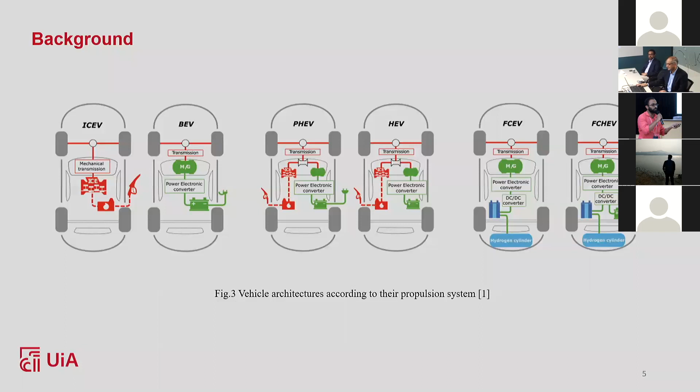Here I would like to highlight that all these vehicles are available in the market, and I had the opportunity during the summer holidays to test drive all of them. While doing the test drives, I observed that each electric vehicle operates in a very different way, and the software for the electric vehicle users is also very different, right? Some of the cars have display software more like a conventional car. But if you take Tesla, especially the Model X, Model Y or Model 3, their software or user display is very different.

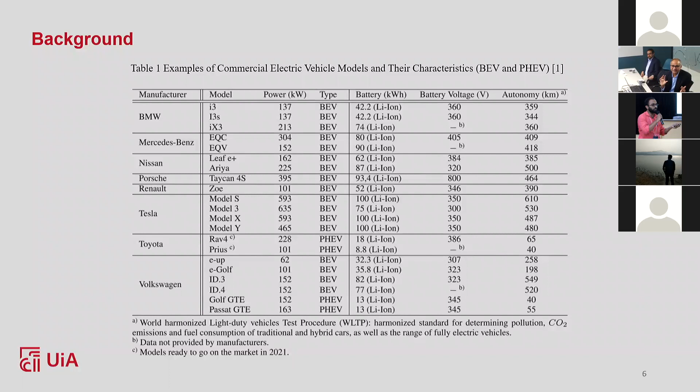But when we are driving, we have to utilize the fast charging station to get the juice in our battery within a shorter period of time. So how can we achieve that? That is going to be the key objective. So here the motivation for the fast charging station is that if we consider, let's say, the 2030 scenario, 40% of the total energy demand is going to come from fast charging stations, and it is even going to increase.

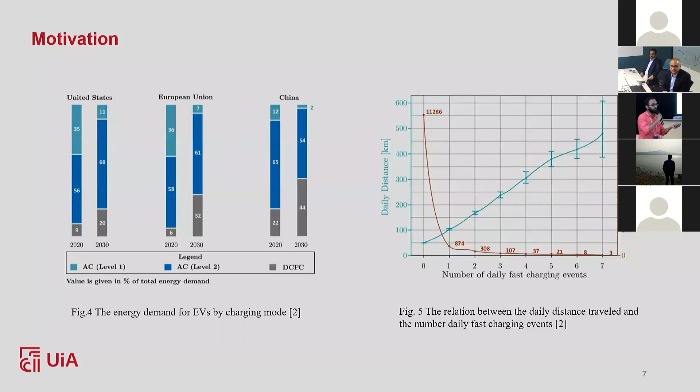Similarly, if we consider figure 5, as the number of electric vehicles increases, and when we want more distance in one charge, then naturally the number of daily fast charging events is going to increase. So when we have more daily fast charging events, they can be provided through fast charging stations. So from the supply side, from the operation side, or from the user point of view, to make the user more satisfied, we need to work on the fast charging station. So that is the main thing here.

So now from the supply point of view or from the operation point of view, and to reduce the demand within the distribution network, we have to work at point number 6, that is the fast charging station. And the fast charging station has to get some information from the car, provided through cable number 3, and that information from unit number 6 has to be communicated to the fast charging station operator also. For that, we need to utilize well established international standards, for example, IEC 61851 as well as IEC 62196.

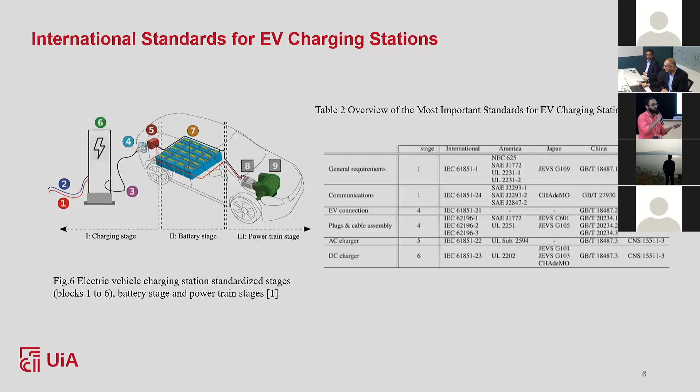So here you can see that these standards have been used by different charging units. They have been classified. I'm going to take those classifications into the next slide. And these standards for the EV charging station depend on region to region, and on how those units can be used. Let's say if we take the standard CHAdeMO, it can go up to a maximum voltage of 1000 volt, and up to 400 kilowatt. Okay, and it has communication based on CAN.

CHAdeMO is used in Japan, GB/T is used in China, CCS type 2 mainly in Europe, CCS type 1 mainly in North America, and Tesla has its own dedicated charger specification or standard. Then another one is being developed, especially taking into account Japanese CHAdeMO and Chinese GB/T, which is going to work at a very high voltage level of around 1500 volt, and it is going to help fast charging stations also. So here you can see that only CHAdeMO has vehicle-to-grid functionality, but the remaining do not. So this is another very interesting point.

What I have seen in many IEEE articles, so many academicians are working from the point of view of vehicle to grid. But here we believe that when we are talking about the fast charging station and getting electric vehicles charged at the fast charging station, this vehicle to grid functionality may not work or will not be useful at the fast charging station. That may be useful at the home level charging station.

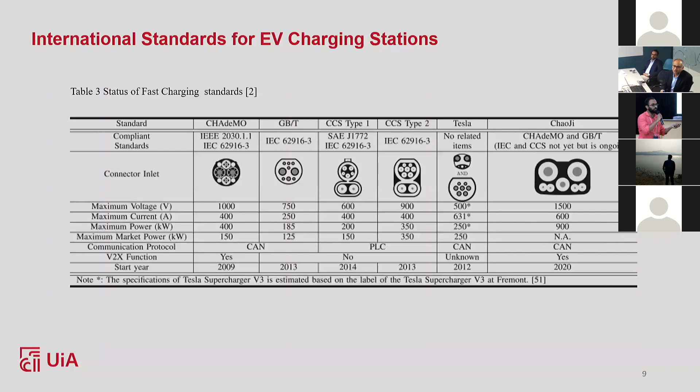So all these things we have to coordinate in a systematic way, and accordingly we have to develop the fast charging station, and then develop software or a control system for optimizing or coordinating the electric vehicle charging in a distributed manner.

So in this slide you can see that our focus is now on the fast charging station. If we take the case of the Tesla Model 3, it has a capacity of 72.5 kilowatt hour and a range of 450 kilometers, the required charging power is 174 kilowatt, and the actual maximum charging power is 250. This 174 kilowatt is required if the vehicle has to be charged within 15 minutes. So you can see how much demand there is going to be, and how we are going to manage that demand in a coordinated way.

So if an electric vehicle wants to get charged on the drive, on the highways, or in the public road network within 15 minutes, how does that demand have to be managed? For example, take the BMW i3, which has a very small capacity and a driving range of around 235 kilometers, with a battery capacity of 37.9, a very small car compared to the Tesla.

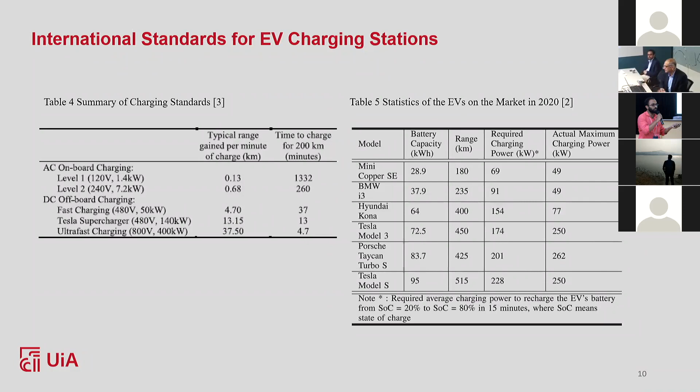Now, when we are talking about the fast charging station, there can be different types of architecture. If you consider figure 6a, considering the distribution transformer, there may be different units, right? And of course we need to have centralized storage also, so that we are in a position to fulfill the fast charging demand within the limited time, considering the grid constraints.

But now, due to advancements in technology, this distribution transformer can be replaced by a solid state transformer, or maybe using a back-to-back converter, reducing the peak demand or the active power demand from the grid by a certain amount and getting it fulfilled from local energy sources or distributed energy sources, including energy storage.

One point is very important: in Konara's master thesis work, he developed an architecture where energy storage and solar photovoltaic were integrated together, based on an AC microgrid architecture, where we implemented droop functionality to provide instantaneous power for the local loads. Such scenarios can be further modified. In place of the AC microgrid architecture, we can use the DC microgrid architecture for fulfilling the load, as described in figure 6b.

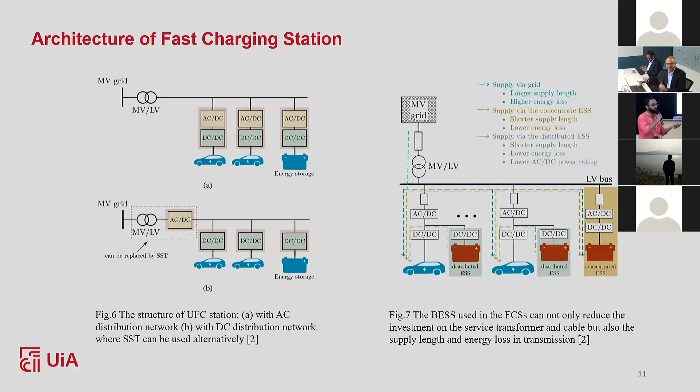For example, if it is a BMW i3, then the requirement is going to be different. If we take the Tesla Model 3, then it is going to be different. So for that, we need to have the charging coordination strategy, where we want to have more research focus, and that research focus we are considering in the PhD work of Konara.

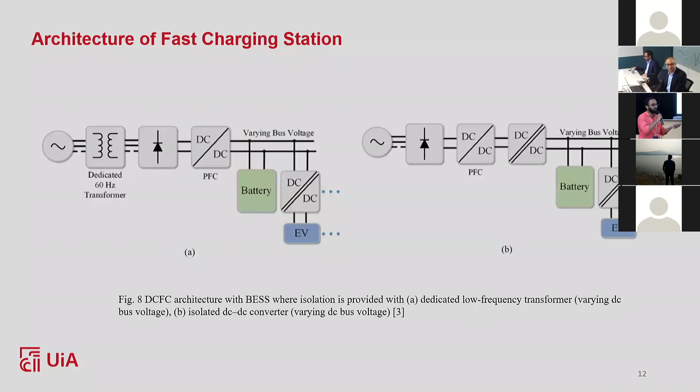And I did very good work on this integration of renewable energy sources, where we can store the electrical energy in the long term in the form of electrolytic hydrogen. So here figure 8b is basically the modification of figure A, where we tried to have the isolation through a DC-DC converter so that the unit can operate autonomously without impact on the back side. So that was the overview of the fast charging station.

What is the market need? We have seen that electric vehicle market penetration is increasing exponentially. Different types of electric vehicles are coming into the market. So we have to supply the different types of electric vehicles in a systematic way, managing the charging demand locally, so that the existing distribution network can help us cope with the upcoming demand of electric vehicles, where the focus is on e-mobility. Then next slide.

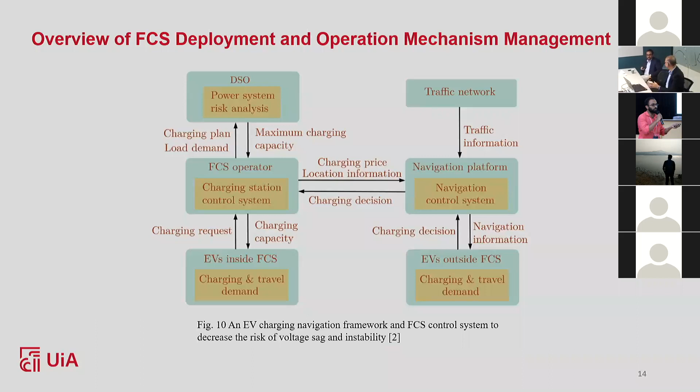So, Konara, please. Okay, I'll take it. Okay, thank you, sir. Greetings from University of Agder. Am I audible? I think, right? Fine, sir. Audible. Yeah. Okay.

So I believe you got a very good understanding of the so-called physical layer, as I usually say, because we should have a very good understanding of the physical layer to move into the computational layer. So far, Professor Mohan very nicely described the state of the art, the standards and the architectures of fast charging stations.

Actually, in this lecture, we are giving a sort of high-level overview, because on any certain topic we could talk for days, since this is a very interesting area. So giving you insight, and helping you find new research directions, is the main motive for this lecture. As a summary of what Professor Mohan described so far, I have incorporated this slide.

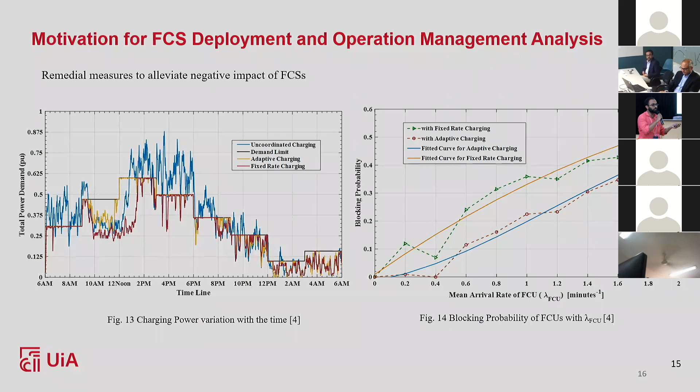So then, when we come to fast charging station deployment and operation mechanism, I'm going to describe this topic in four subtopics: optimum siting and sizing of the fast charging station, techno-economic sizing of the fast charging station, charging management or optimum scheduling of electric vehicles within the fast charging stations, and overall performance assessment of the fast charging station. If you consider these four main subtopics, we can abstract this whole process into three main objectives.

Actually, with this computational layer of fast charging stations, we are basically trying to maximize the fast charging station profit. While maximizing the profit, we need to minimize the impact on the power grid as well as the electricity market. And at the same time, we need to provide high quality service to EV users. So these are the main three objectives we need to achieve in deployment analysis and in proposing different operation mechanism strategies.

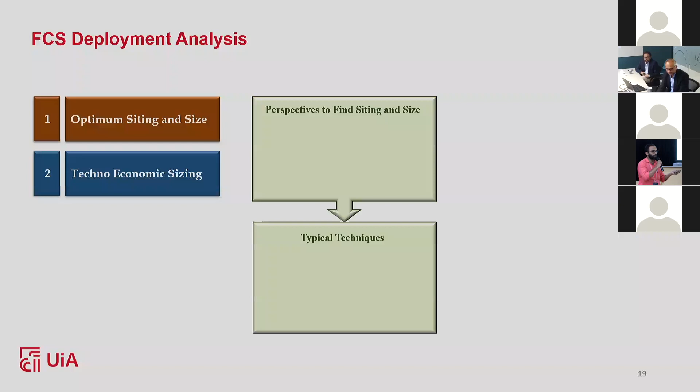So basically, if you refer to the literature, you can find optimum siting and sizing of fast charging stations and techno-economic analysis of different components under fast charging station deployment analysis. When we come to optimum siting and sizing, we'll move on with certain perspectives of finding the optimum site with the optimum size of the fast charging station, along with typical techniques. These perspectives are very important to model the fast charging station deployment problem, then these aspects will be analyzed with different techniques.

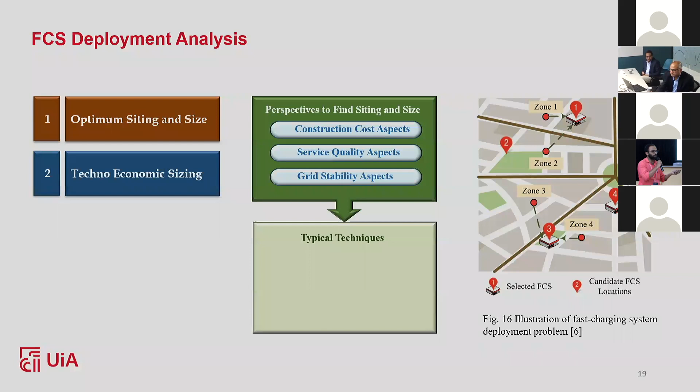So these aspects can be modeled with these techniques. Now I'm going to explain these different techniques. So basically, mainly we can see optimization models, graph theory based models and queuing theory based models. Of course, I need to highlight that the techniques are not limited to these three. Depending on the nature of your problem, you can incorporate whatever technique is convenient, but if you refer to the literature, you can see these are very common and typical techniques with which these aspects are modeled and analyzed.

Here, I want to highlight one important point, that is, when we are proposing a deployment strategy with the objective of, let's say, construction cost aspects, the other aspects can be taken as constraints to that particular problem. Therefore, these aspects can be used as objectives as well as constraints in formulating your fast charging station deployment problem.

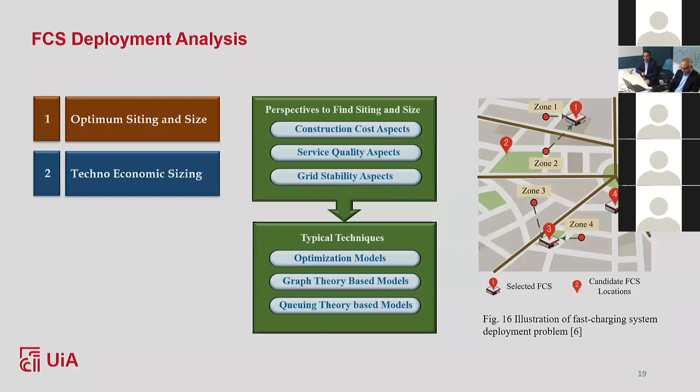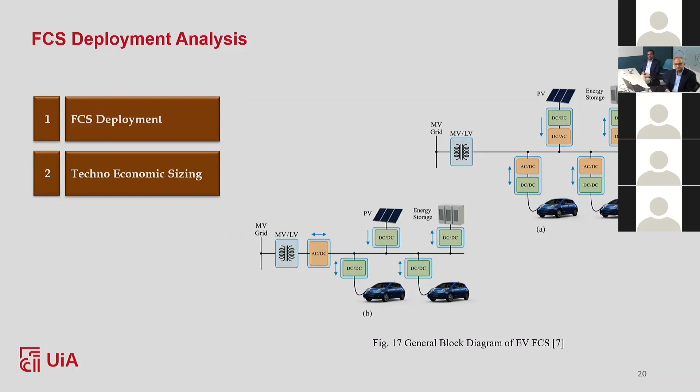Actually, as Professor Mohan explained, for a fast charging station, it is not recommended to come up with only grid supply. It should be supported by a renewable energy system or an energy storage or a local distributed generator. Therefore, we need to properly size all these components. The analysis associated with this sizing comes under techno-economic sizing. This is also a very interesting area where you can work. And that is the fast charging station deployment analysis.

Now I'll step to the operation mechanism management, because once you deploy a fast charging station, definitely we'll have to focus on innovative operation mechanisms. Otherwise, you will not be able to effectively, optimally utilize your charging resources, which include electric vehicle supply equipment and the local distributed generators, renewable energy systems, or energy storage.

Then you should have innovative operation mechanisms. Otherwise, you will lose your potential customers because of service dissatisfaction due to high blockage, high waiting time, high charging time, and those things. So in this context, first I would like to talk about charging management or optimum scheduling. Actually, here I will give you an overview of charging management. This is not focusing only on a fast charging station. This includes residential charging as well.

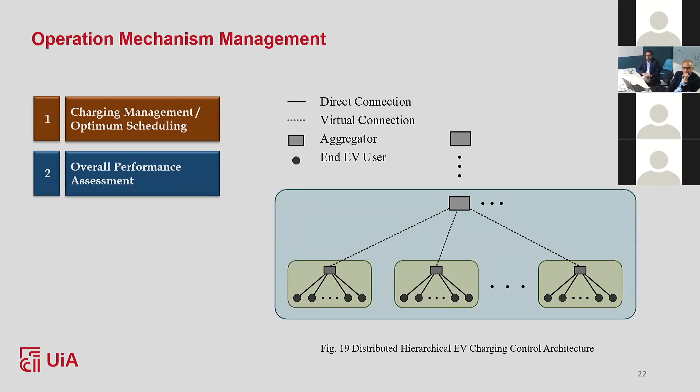So here we'll try to move on with different aspects associated with charging management and optimum scheduling: control aspects and timing aspects, and these aspects are modeled with different techniques. We are going to consider in this slide different aspects on which these charging management and optimum scheduling problems are formulated, and then we are going to look at how these aspects are modeled and analyzed with typical techniques. This is just an overview, because if you consider one particular strategy, we can talk hours and hours.

So here I have used one architecture that I have used in one of my papers. Actually, this is a practical implementation of a hierarchical approach of coordinated EV charging, which I explained in the previous slides with figure number 19. Here you can see electric vehicles will be aggregated at the lower layer, and the energy controller at the lower layer will report this information to the immediate upper layer. And at the immediate upper layer, it is the charging station aggregator. Actually, in this particular work, the charging station aggregator owns several charging stations within a certain area.

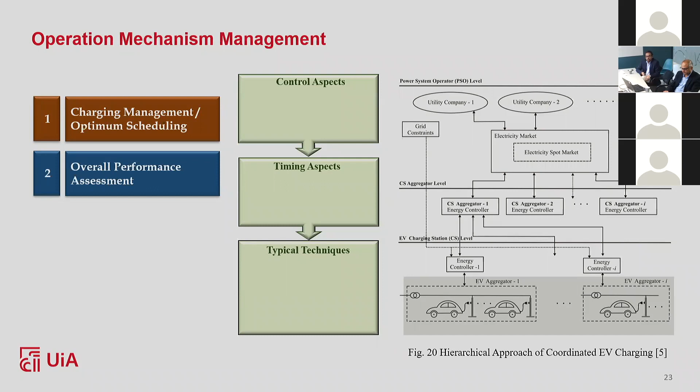Okay, so actually, a little bit stand up, because otherwise I'm fed up. Okay, so I'm also bored.

If you consider control aspects, first I would like to step to the control aspects. Basically, they have considered as the control aspects the economic aspects, that means maximizing the EV aggregator profit and also minimizing the EV charging cost. And then the operation aspect; as the operation aspect, authors have considered several aspects.

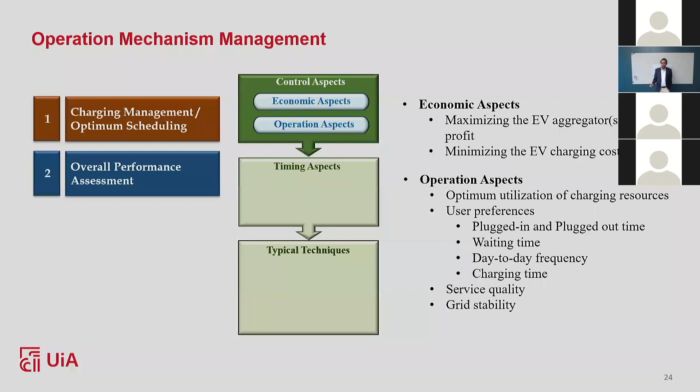Optimum utilization of limited charging resources and different user preferences, because there is a vast variety of preferences when you come to user preferences, that is the plug-in time and plug-out time, waiting time, day-to-day frequency of electric vehicle charging, and so on, and the service quality. So the quality of service associated with your EV charging, and then grid stability. Those aspects are very commonly taken into account in proposing charging management strategies depending on your problem.

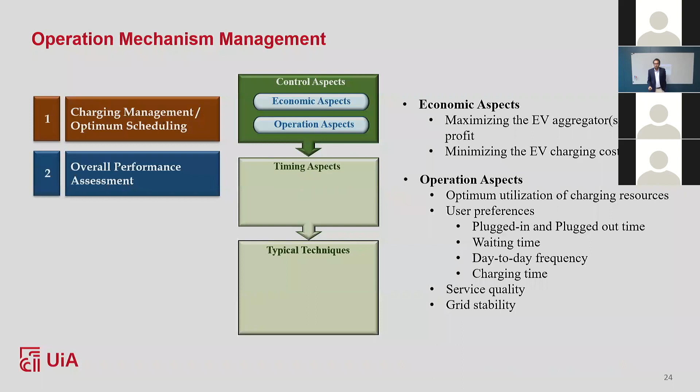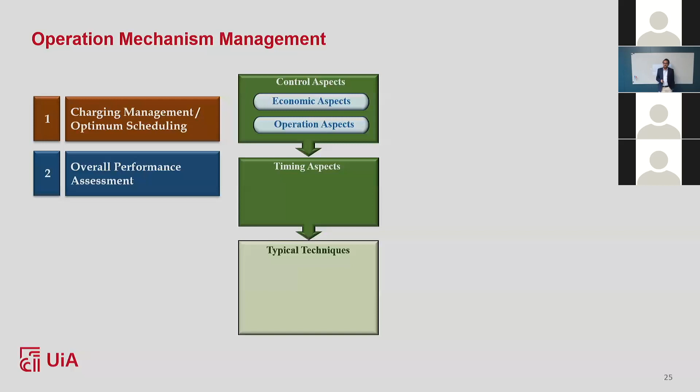So then I'm going to step to timing aspects. Timing aspects mean basically, as you can see in this picture, we have offline strategies and also online strategies. In offline strategies, we are going to schedule the electric vehicle charging process in advance. So in figure 21, you can see with green color, we have scheduled electric vehicles, let's say, a day ahead by considering forecasted information.

But when we come to real-time strategies or online strategies, we have to remember that electric vehicles arrive to the fast charging station opportunistically. So then, depending on the real-time situation, real-time information, we have to perform the charging management.

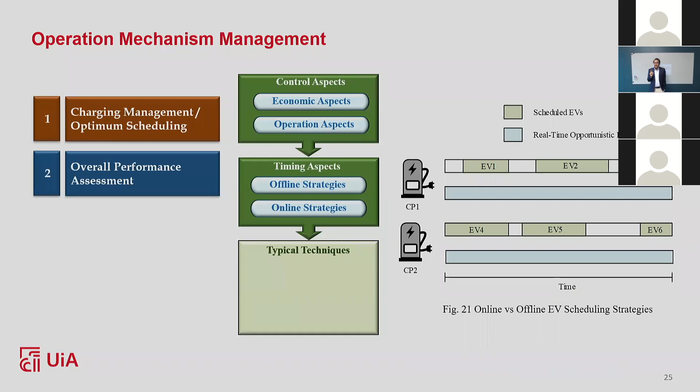And but there are certain uncertainties associated with the fast charging management. When you come to offline strategies, we don't have a very big room where we can address these uncertain aspects, because since we are scheduling our electric vehicle charging schedule in advance based on the forecast demand,

we may not come across the real mobility data and the demand uncertainties and the price uncertainties, and especially supply equipment failures, so on and so forth. There are several uncertainties associated with electric vehicle charging management, but in offline strategies, it's very difficult to cope with these uncertain aspects.

But when you come to online strategies, of course, we can address somehow this uncertain aspect. But the thing is, we don't have much flexibility to shift the electric vehicle demand, the requested demand, in a certain time horizon. But in offline strategies, we have a room to shift the requested demand within a certain horizon.

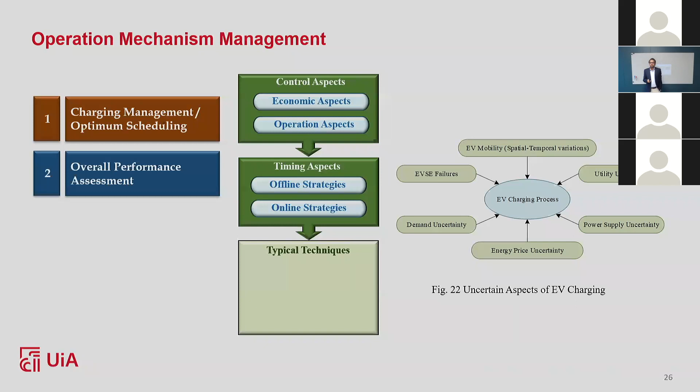So as you can see in my last figure, figure number 22, I have explained that basically in my PhD, my approach is how these uncertainties are addressed with different electric vehicle categories. And then I'm going to move to the typical techniques by which these aspects are addressed.

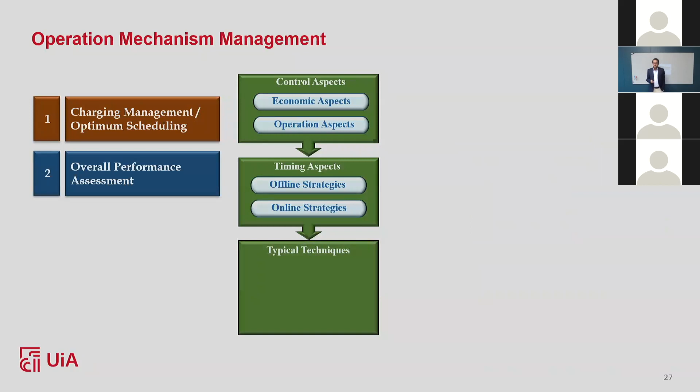Most commonly, optimization models we can find in the literature. So as typical optimization techniques, linear and quadratic programming and stochastic programming, where we can address certain uncertainties, and convex optimization, because here we have to very clearly understand in online strategies we have to pay attention to the computational complexity, because we are performing all these strategies in real time. If your proposed algorithm takes a lot of computational time, it is not a feasible or practical solution.

Therefore, we have to linearize, or we have to simplify your nonlinear problem, maybe with convex optimizations. And game theory and genetic algorithm, of course, not limited to only these presented techniques. There are some other techniques as well, but I have selected some typical, most commonly used techniques for your information.

And some heuristic algorithms, because we can propose our own algorithm, our own pricing mechanisms, our own energy management mechanisms with heuristic algorithms, because rather than going for available optimization techniques, we can propose our own strategies with different heuristic algorithms as well. And also queue-based models can be incorporated to model these different aspects.

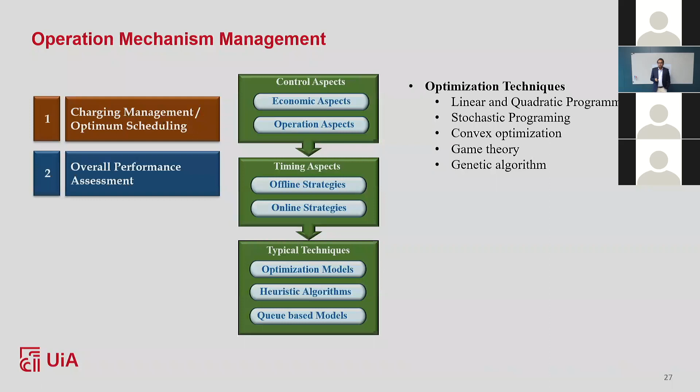So then for this charging management problem, typically we are feeding energy price, power and energy, EV mobility, utility constraints, grid constraints, battery constraints. Of course, you have to pay very intense attention to these battery constraints, because as you have clearly identified in Professor Mohan's part, electric vehicle manufacturers manufacture electric vehicles with different ratings, and we have to cope with all these battery constraints in proposing feasible and practical charging management strategies.

That's why we decided to put some slides on the physical layer, which I always prefer to say physical layer, because without a proper understanding of the physical layer, it is very difficult to propose feasible and practical operation mechanism strategies in computational layers of a fast charging station.

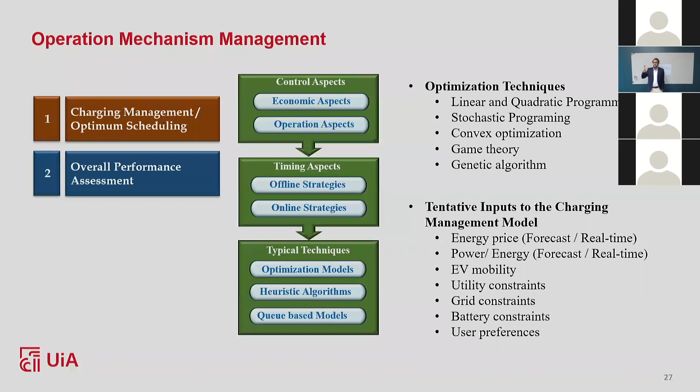And then the next part of the operation mechanism that is very important is the overall performance assessment. Because if you consider a fast charging station, there are some traffic inflows and traffic outflows. But the thing is, not all the inflows are guaranteed to plug into or be admitted to the fast charging station. Some portion will be blocked.

And also, out of the plugged-in electric vehicles, there is no guarantee that all the electric vehicles will reach the requested state of charge. Some portion could be subject to forced terminations due to several uncertainties. Therefore, we should have an overall picture of these proposed strategies. That is very important. This is a very good area for you to work, because I have seen a serious research gap in this area related to performance assessment of different charging management strategies.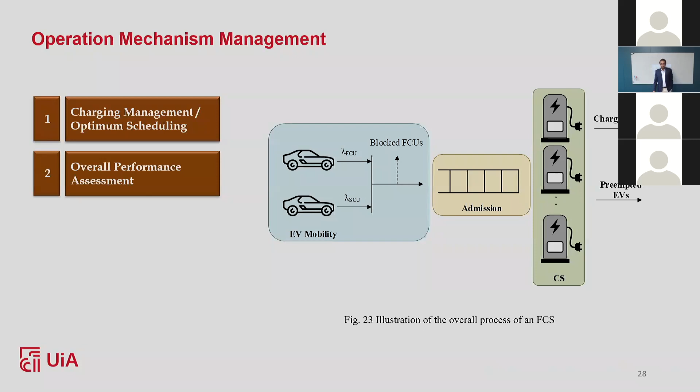As a conclusion, initially we have given you an insight into the physical layer. Always I'm using the word physical layer, where all the physical implementations take place, the current status and the relevant international standards. That is also very important in proposing feasible and practical charging management strategies, and what are the possible architectures of fast charging stations.

As Professor Mohan mentioned, we can build a fast charging station as either an AC microgrid or a DC microgrid. When we come to AC microgrid, again, we have two options: AC coupled architecture and DC coupled architecture, something like that. So there are certain architectures with certain distributed generators or renewable energy systems or energy storage with different control strategies.

And also we have to find the optimal siting of the fast charging station within a certain area. Before deploying a fast charging station, we have to analyze what is the optimum location where we can deploy the fast charging station, and what is the optimum number of electric vehicle supply equipment that can give service to the electric vehicles at the fast charging stations.

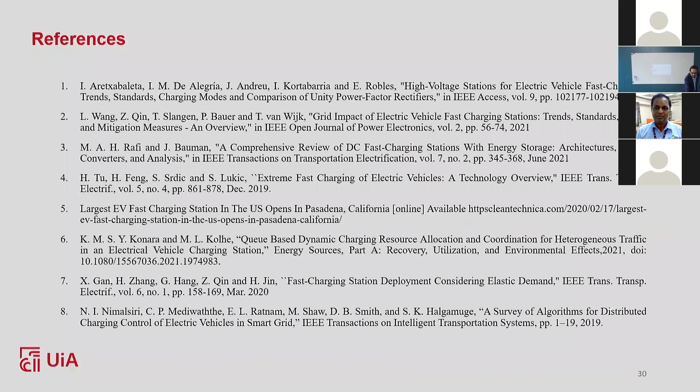In one of the slides, Konara mentioned that we want to do coordinated electric vehicle charging, considering the different categories of users. And as we know, there is some time limit for charging one electric vehicle. So of course, we are going to have some blocking probability, or blocking of electric vehicles from charging. And maybe the secondary users who are preempted, or the primary users, may have forced termination of their electric vehicle charging also.

So this is very interesting work, and we are trying to develop an algorithm in which we can have coordinated electric vehicle charging at a fast charging station, where we can serve the primary users and the secondary users, and accordingly manage the charging considering the available resources also.

And such an operational mechanism may be useful for the charging station operator to make a profit, and also to establish and develop local distributed energy resources based on the demand which is going to be created due to the exponential growth of electric vehicles, with different sectors or different capacities also.